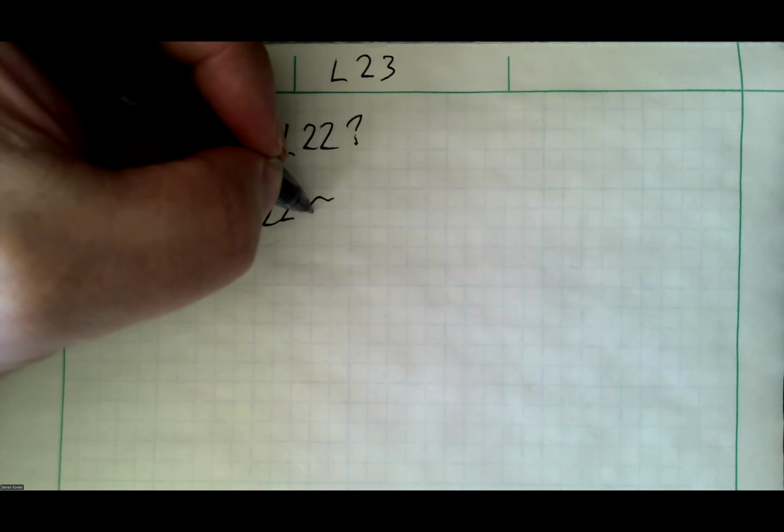Now, I want to mention I'm labeling this lecture 23. If you're following along, one might wonder where's lecture 22? Lecture 22, just for my labeling system, is equal to a chapter on exergy in the Cengel and Boles text, and you find a chapter about exergy in a lot of different thermodynamics texts, and I don't really feel like frankly wasting our time with that. I just don't normally do it. If I've got an abundance of time, I used to do it, and it's a very simple concept. I don't spend a lot of time with it.

Anyway, all that to say, I've left a placeholder, so if I find myself with like half of an extra day and really not much else to do, we'll do that lecture. And who knows, maybe if I go back after the fact and add lecture 22 to this playlist, and it's like, Steve, I just watched lecture 22, I went back and added it later because I had an abundance of time for some reason. We're skipping lecture 22. It's very much an optional topic.

And we're at this point in a thermodynamics course, right? If you look at what we've covered, lecture 1 through 21, we've really focused on the first law, second law, and using those in conjunction with other laws, rules, equations, relationships to solve problems. And that is for a thermodynamics one class. We've met typically your learning outcomes for a standard engineering thermodynamics introductory course. So we've hit this point in the semester where we've done what we would typically need to do for your course to transfer just about anywhere.

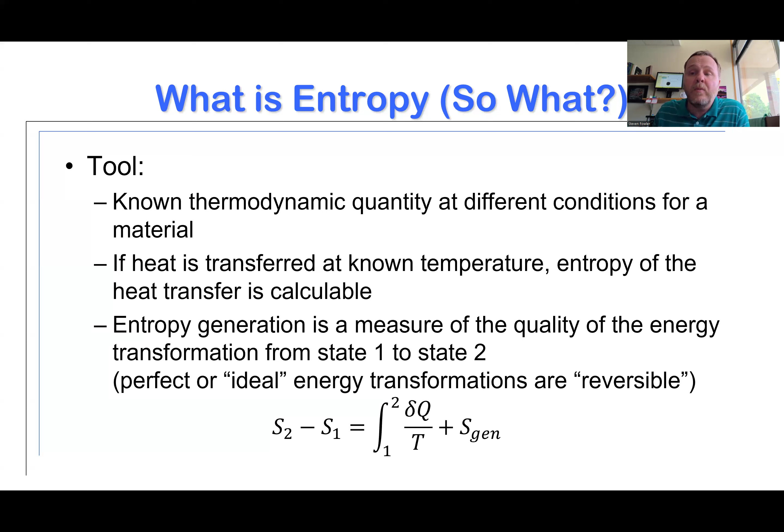I love the way he's phrased this here. Entropy generation is a measure of the quality of the energy transformation from state 1 to 2 of the substance. A perfect or ideal transformation is reversible, meaning it has not generated new entropy that we didn't have when we started. So again, when you generate entropy, it's either in the system or the surroundings or both, but it's somewhere. There's more entropy than when we started. That's because nothing is perfectly reversible.

And we believe destroying entropy is impossible. Okay. But what we might want to do is figure out, well, if I've got some process from state one to state two, or some device that takes material and converts it to some other phase or state of that material, I might want to know how good is that device at doing such things.

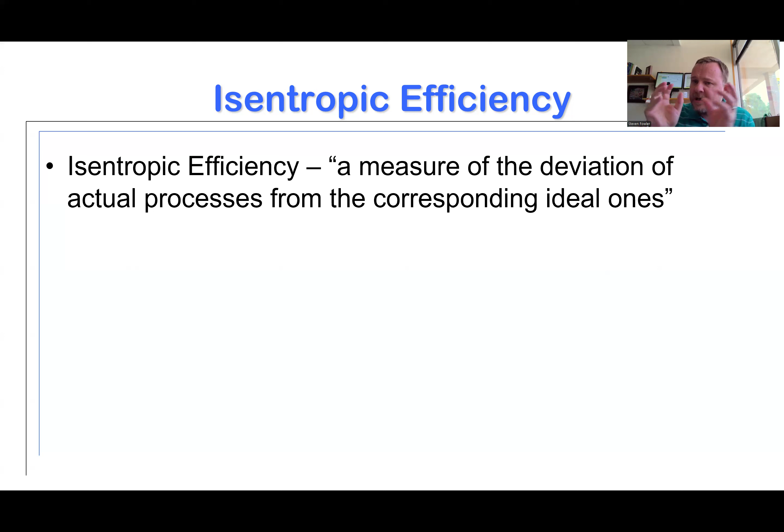The isentropic efficiency is a tool that we can use to measure the deviation of an actual process we might have in front of us relative to a corresponding ideal process, comparing the two. Just like any other efficiency or performance, comparing something to something else of the exact same dimension, the exact same type of measurement, and comparing how one stacks up against the other.

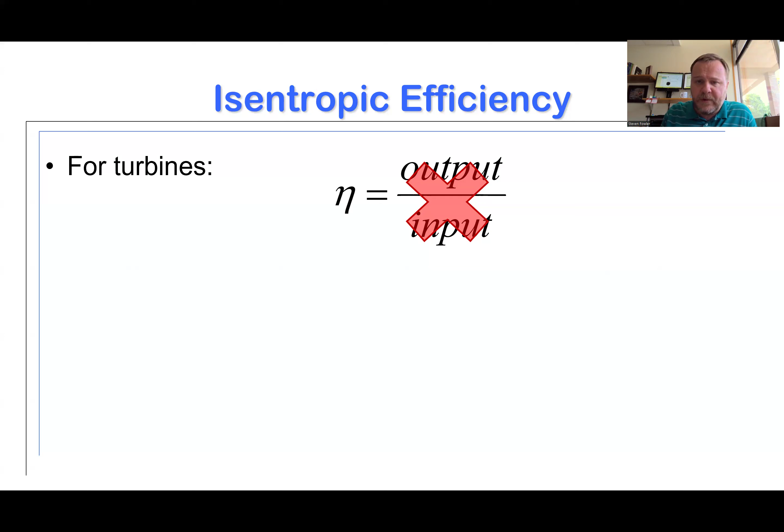Now, the Cengel and Boles text loves to pretend that every single efficiency can be expressed as an output over input. And most of the time that works. Here's kind of a case where it starts to fall apart just a little bit, especially if we talk about compressors. But we're going to talk about a turbine first. The isentropic efficiency for a turbine would be the actual turbine work divided by the isentropic turbine work.

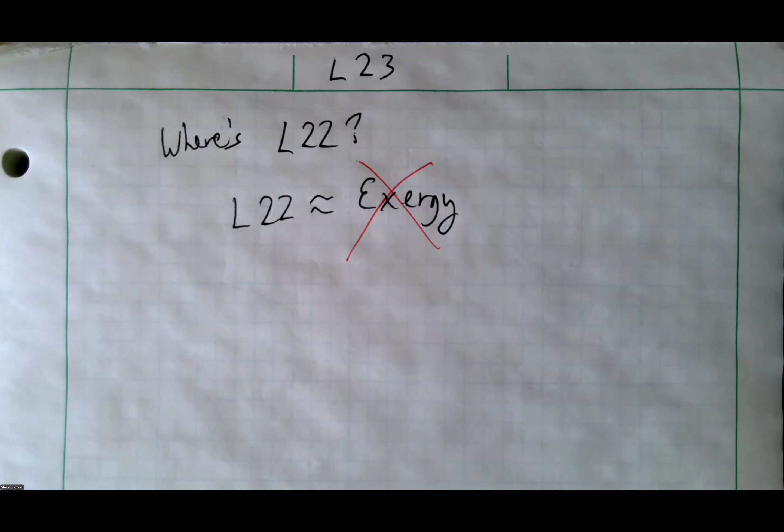What does that mean? Let me switch cameras on you here. Let's go to the document camera and let's look and see what that means. And I'm going to stop sharing so you can see this full screen, okay?

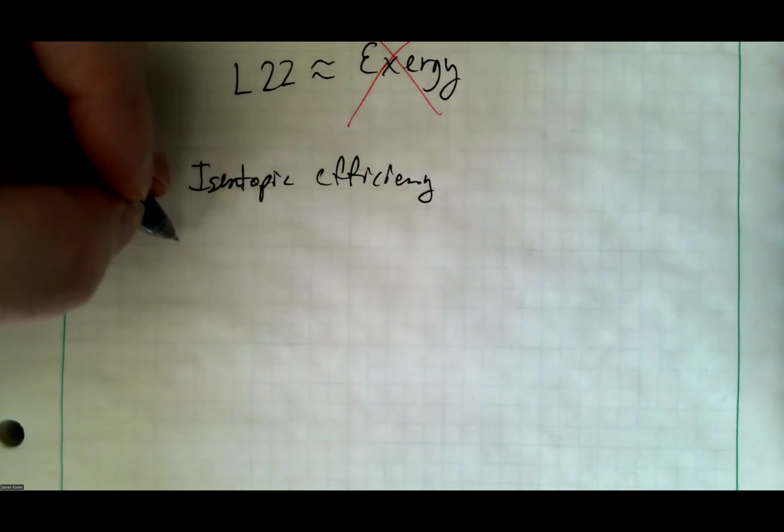So isentropic efficiency for turbines, eta sub t, t for turbines, eta for efficiency. And we said earlier that is the actual turbine work divided by the isentropic turbine work.

Okay. Now, if I look at a turbine, we know we're going to have mass coming in. We know we're going to have mass going out of the expanded or wider end. And we know we're going to pull work out of this thing. And so if we do a first law, you've got minus this power output plus m dot times h1 minus h2. Maybe there's a kinetic change.

Maybe it's insignificant. If it's an ideal isentropic turbine, that means it's adiabatic and reversible. So it's adiabatic, so there's no heat transfer. Right? So that means that the little w work out, that being the power output per unit mass, is equal to h1 minus h2.

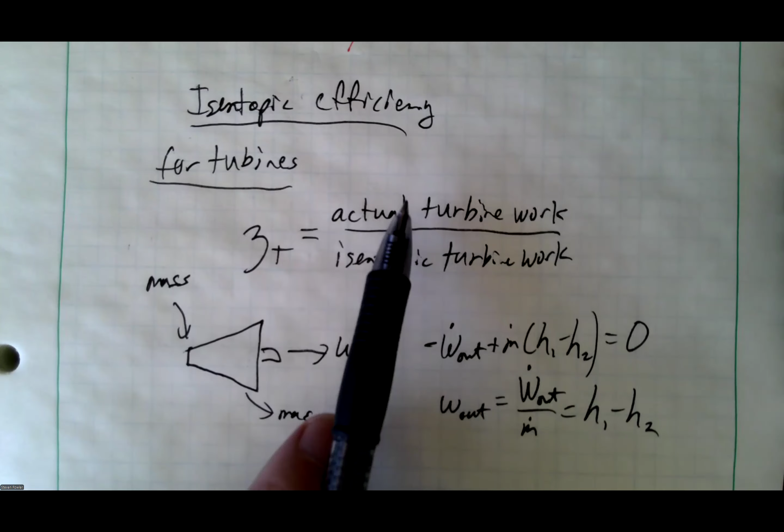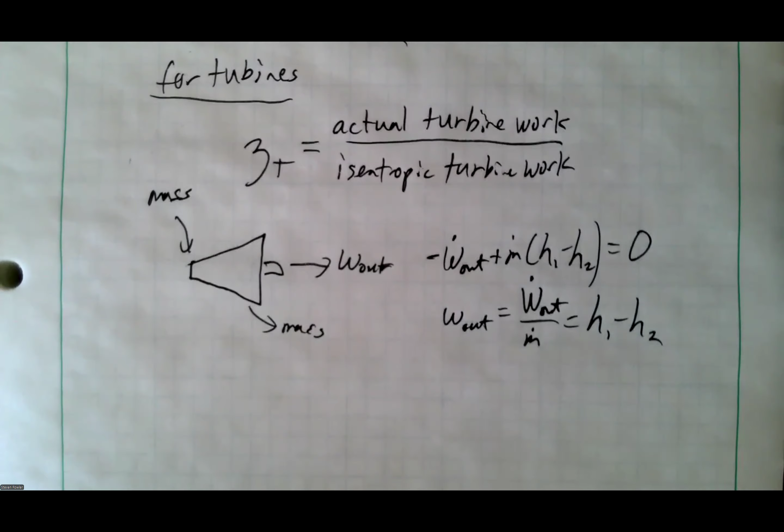So here we're saying I'm going to compare any actual turbine to any isentropic turbine. So I probably will want to compare per unit mass, because then it doesn't matter how big or small this turbine is, I'm comparing apples to apples. And so I can compare any size turbine to any other size turbine through this ratio. So to compare the isentropic efficiency, I can take the enthalpy change for an actual turbine and compare it to the enthalpy change for an isentropic turbine.

Now, why this specific ratio? Well, remember, I'm not the huge fan or advocate of output over input that the Cengel and Boles text is. One of the few places I don't care for what the text does. Output over input doesn't always work. What does always work for a true efficiency is what you expect to be the smaller quantity divided by what you expect to be the larger quantity.

And we expect that an actual turbine that you or I might construct or stand in front of and actually operate is going to generate less work out than the isentropic turbine will. So the work provided by the actual turbine is going to be my numerator because I expect that to be small.

The ideal isentropic turbine, it's going to generate more, or at least I'm going to expect that it's going to generate more. It's going to generate the maximum work output. So that's going to be my denominator. That's the larger quantity. So that's going to go in the denominator of my efficiency.

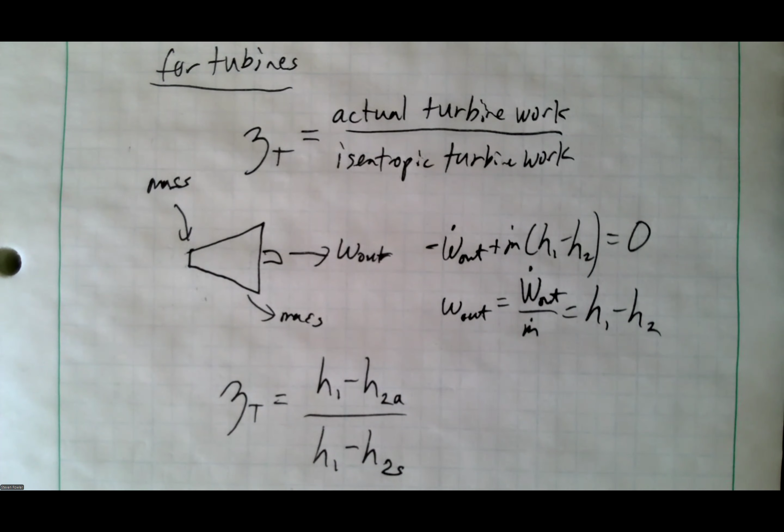So with all that in mind, you go back to share here. I apologize. Here we go. So with that in mind, and here we are, right?

Now, I'm neglecting heat transfer of the actual turbine. I'm neglecting any potential change in kinetic energy. I'm just focused on the enthalpy change. Gives me a good approximation for this quantity. If we look at that graphically, I'm comparing the actual turbine to the ideal isentropic turbine.

So I'm going to start at the same H1, the same inlet conditions. So inlet pressure, inlet enthalpy gives me some inlet entropy. Notice the isentropic turbine goes straight down. No change in entropy. It's isentropic, meaning constant entropy.

The actual turbine is going to actually generate a little bit of entropy. So it's going to come out here to an S2 value that's higher than S1. So the actual turbine is going to come out to a higher entropy because it's being generated. So notice to get to the same exit pressure, to experience the same pressure drop from the inlet to the outlet, notice that to meet that same line of constant pressure, when you generate a little bit of entropy, you

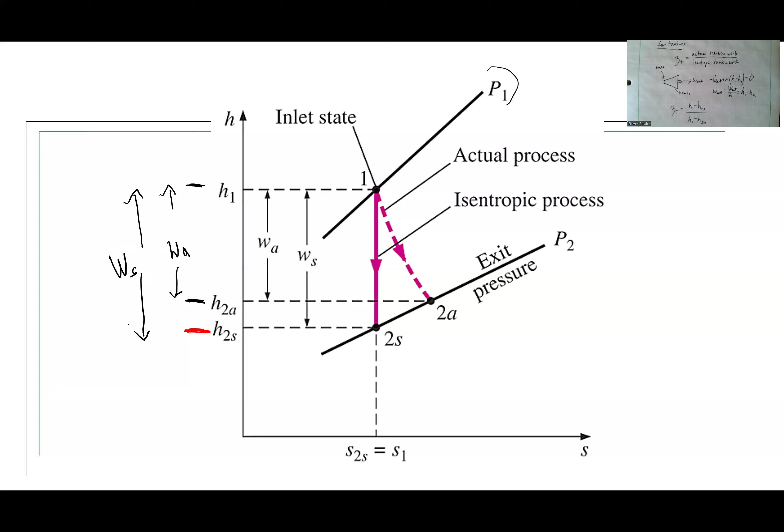So notice that the difference to get down here, the work for the isentropic turbine is more than the work for the actual turbine to get to the same exit pressure. And that's what this ratio is showing us here. Okay? This is showing us that the work of the actual turbine is going to be less than the work of the isentropic turbine.

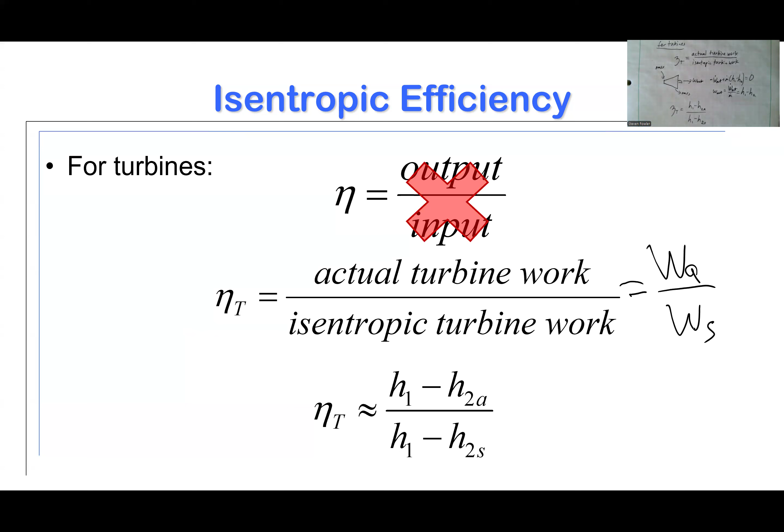Okay. Yeah, that's good enough. I don't know why I backed up.

If we look at a compressor. So the isentropic efficiency for a compressor, and I write up here instead of output over input, think of it more in terms of ideal over actual. Again, a true efficiency needs to be what you expect to be the smaller quantity divided by what you expect to be the larger quantity.

Well, remember we've said in chapter 7 that the reversible compressor, the ideal compressor, is the one that consumes the minimum amount of work. So the least amount of work, that means that's the smaller quantity. That means that's going to go on your numerator in your efficiency equation. So this is the quantity we expect to be smaller, the work input for the isentropic device, the reversible adiabatic device. The actual compressor is actually going to consume more work, so that becomes our denominator.

But in both cases, we could draw the same, basically, remember, a compressor is kind of the reverse of a turbine. So I've got mass going in, mass going out, and then I would have work going in. And your first law kind of looks the same way. It ends up being the work in is equal to the enthalpy change. In this case, H2 minus H1, because the sign changes.

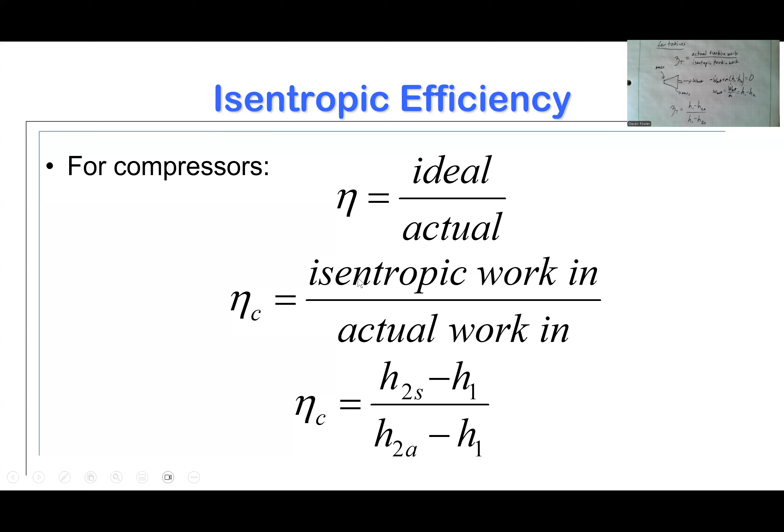But otherwise, it's roughly the same quantity that for both the isentropic and the actual compressor, the main driver of the work required in this case is going to be the enthalpy change. And so that gives us a really good approximation. I can take the change in enthalpy for the isentropic compressor divided by the change in enthalpy for the actual compressor, and the comparison of those two quantities will give me the efficiency.

And so we can see the same type of diagram, kind of the inverted form of the diagram that we just saw for the turbine. Notice they both share a common inlet state. To get from that inlet state to the isentropic outlet state, we go straight up, we go vertically to reach this higher pressure, the exit pressure. Which does not require as much of an enthalpy change.

You can see WS here does not require as much of an enthalpy change to get from here to here as it does to get up to the actual enthalpy for the actual compressor that's going to generate entropy, and therefore has to get out here a little bit further along the S-axis to reach the same common exit pressure. Okay.

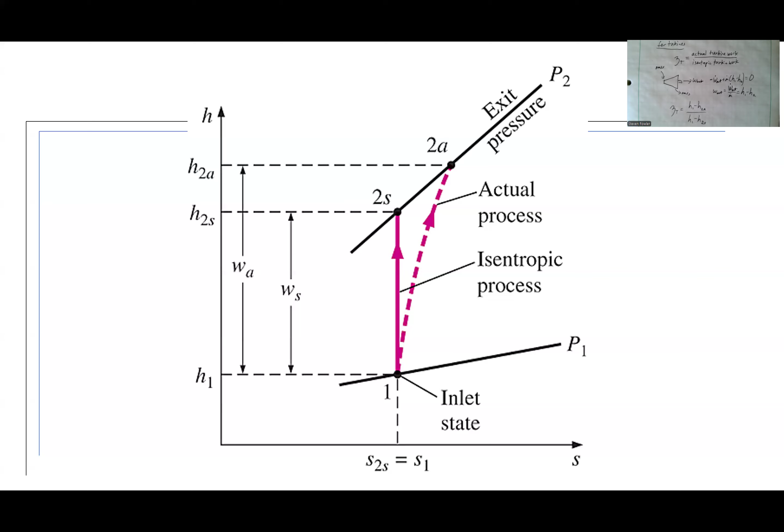So we're going to come back to this one, or we'll start a new video there and work an example.